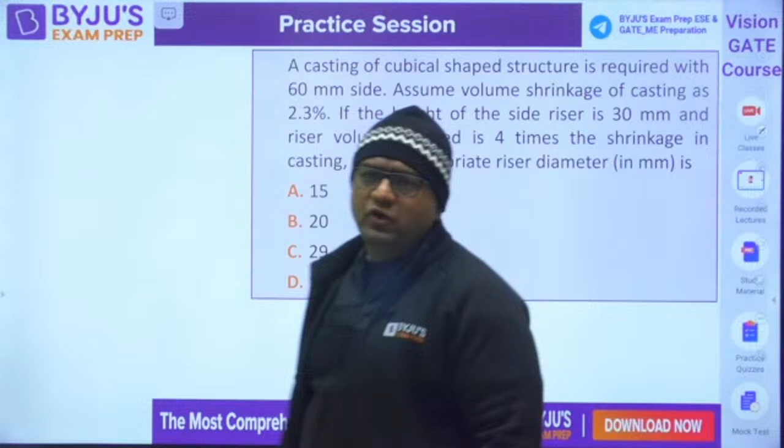So guys, now this is the very first question in front of you from casting. You just need to be with us till your exam. We are having each and every arrangement for you.

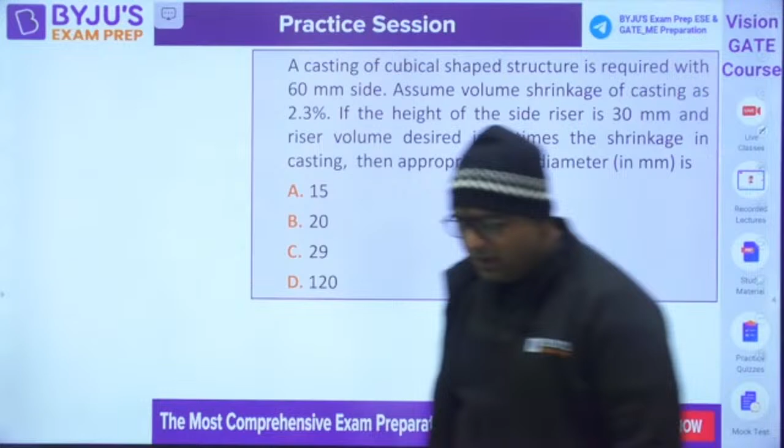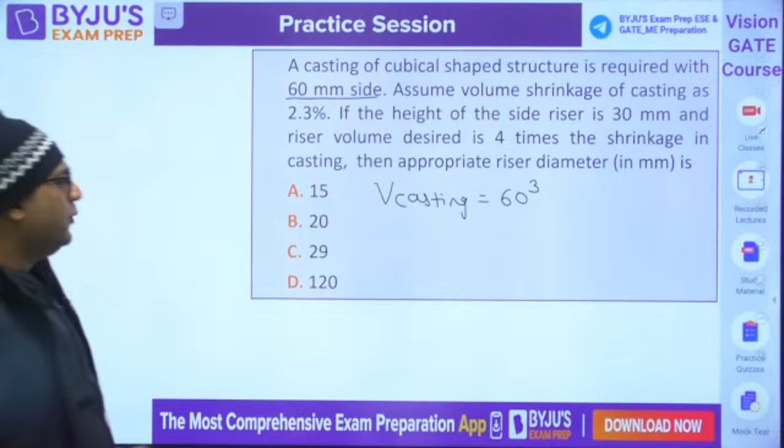Okay, so this is the very first question. A casting of cubical shaped structure is required with 60 mm side, and this is the casting size. So if someone will ask you what is the volume of casting, then volume of casting is nothing but 60 cube. Then they are saying assume volume of shrinkage is 2.3%. So 2.3 by 100 into volume of casting. This is the shrinkage volume.

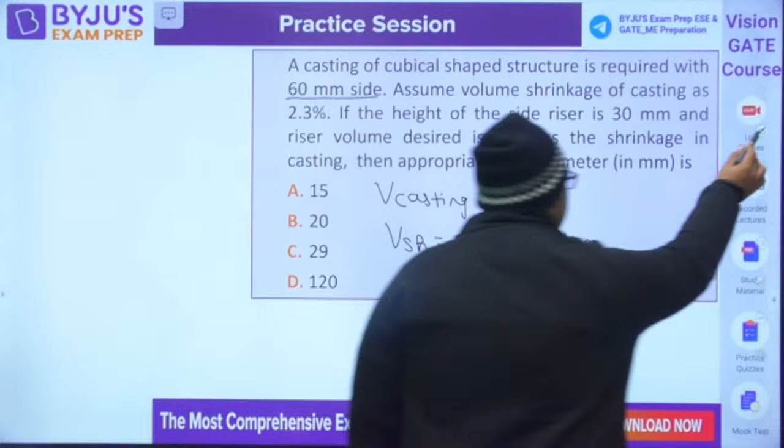Then they are saying the height of the riser. They have given the height of the side riser. Height of riser is 30 mm. When height of riser is given, now you know they have also given that riser volume is 4 times the shrinkage volume. So they have given one data which you will be using, and you will be saying the volume of riser is 4 times the shrinkage volume. So when you will be going for that, since it is a side riser, it is first of all pi by 4 d square h. H is known to us.

Four times shrinkage volume. From here you would be getting the diameter value, but don't answer it as it is, because this is the shrinkage volume method. Here the scope of improvement is there.

So you need to check whether the modulus of riser is more than or equal to the modulus of casting or not. Modulus of riser will be volume by surface area. Volume is nothing but pi by 4 d square h. Surface area is 2 into pi by 4 d square plus pi dh.

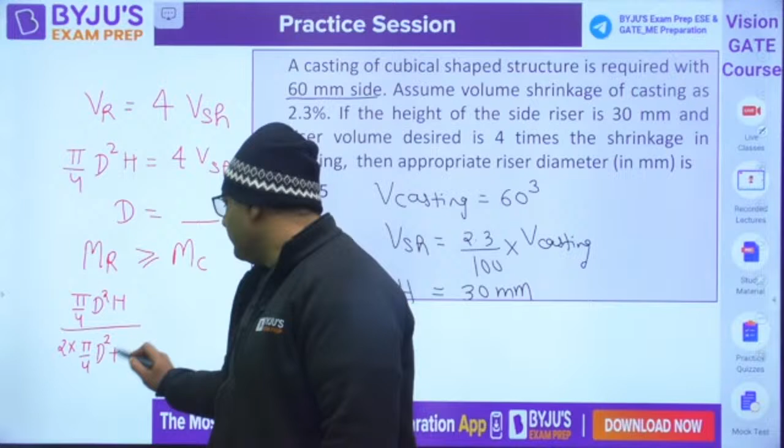This is going to be the surface area, and you need to equate it by volume of casting, that is 60 cube, and what is that, 6 into 60 square, 6a square. So this will give you some value of diameter.

You need to consider the maximum of both will be the answer. Whatever be the more, that would be your answer. Just solve this question, guys.

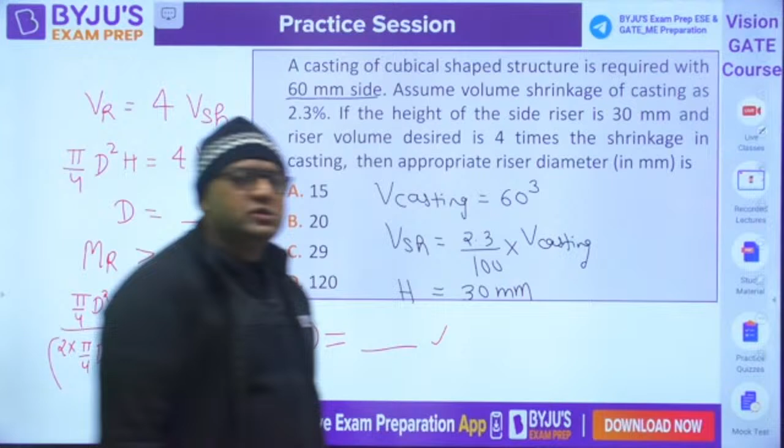Solve it, guys. Solve it, guys. I want answer from all of you guys.

Yes, all the things are in front of you. You just need to do the calculations, nothing more than that.

Shreyas is saying answer is coming out to be 20 mm. 20 or 120, Shreyas? Please check 20 or 120.

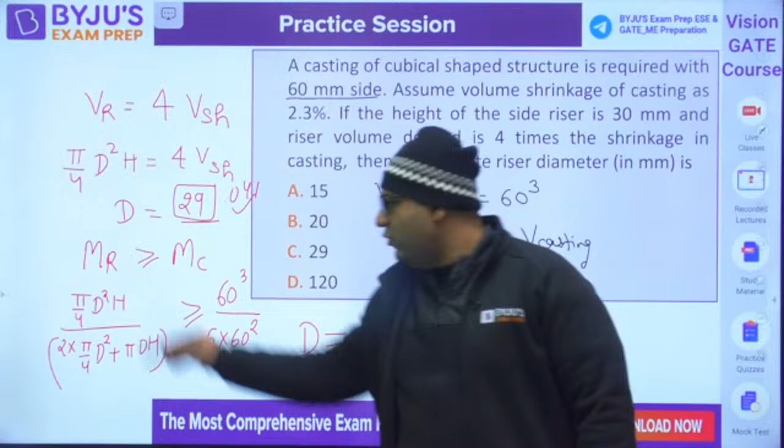So then you need to find out this also, na, modulus of riser more than or equal to modulus of casting. That will give you what? Because maximum of both will be the answer.

Okay, in modulus you are getting 12. Faninder, okay, solve it. So when you are going to put pi by 4, here I am finding out d square, and I am having height given to us.

So when height is given to us, you will be putting the same value of height which is given. It is nothing but 30 mm.

So into 30 divided by 2 into, as it is a side riser, so 2 into pi by 4 d square plus pi dh. So from here you need to find out, it is more than or equal to 60 by 6. That will give you one value of diameter.

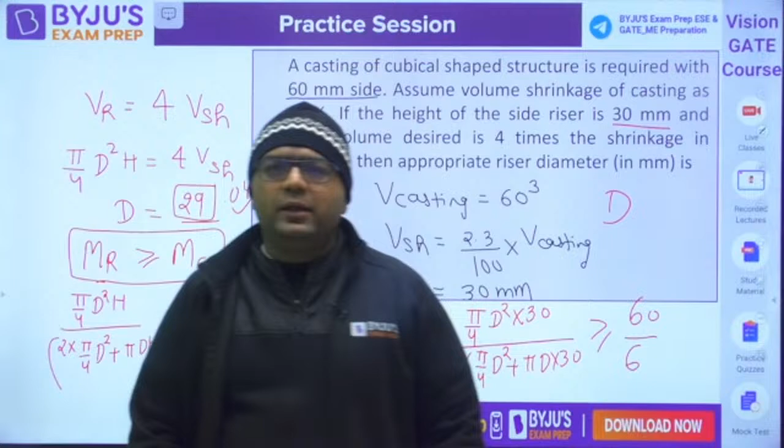Okay. So now if you are getting this value as 29.047 and this value is coming less than 29, then definitely 29 would be the answer. And if this value is coming more than 29, then this will be the answer.

And when you will be calculating from this, you will be getting 120. So answer will be D.

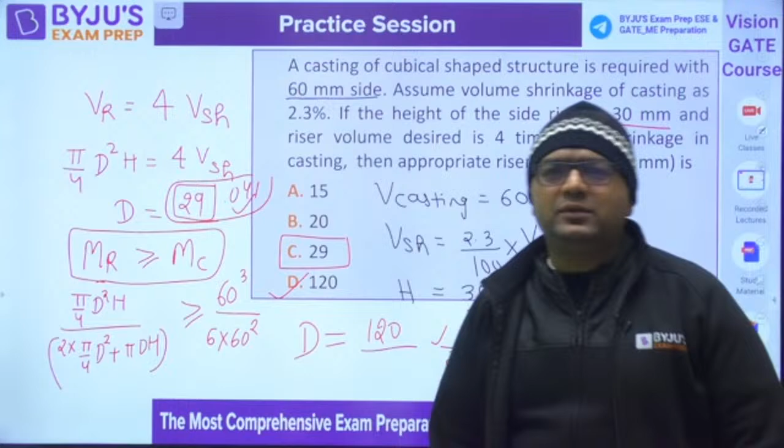That was the mistake you guys were doing, and I was thinking when you will give the right answer. Now I feel Ajay, Rishi, Shreyas have given the right answer. Yes, very good. Fine. 120 would be the right answer.

That's why I was thinking, okay last time the class was very late, now what mistake did I make in the calculation. Okay, so this question is over.

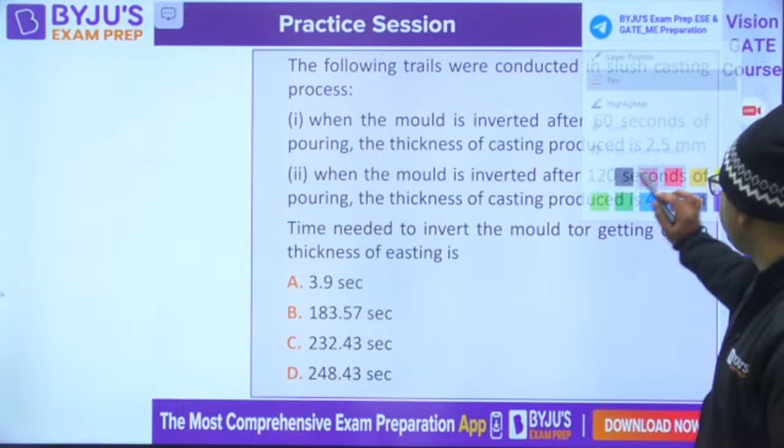Moving further to the second question. This is from slush casting. If you remember, that also I taught you in the marathon. What this casting is saying: the following trials were conducted in the slush casting process.

When the mold is inverted after 60 seconds. If you remember, for that we know TS, solidification time, is directly proportional to thickness square. From here we have written thickness equals C1 square root of solidification time plus C2.

So you know that when the mold is inverted after 60 seconds, thickness is 2.5 mm. So 2.5 mm equals C1 square root of 60 plus C2.

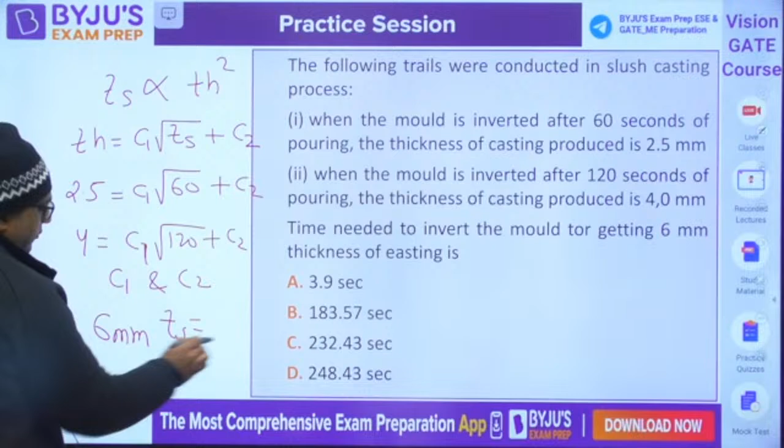Second, they are saying 120 seconds for 4 mm, C1. 120 plus C2, this will give you C1 and C2. Then you need to find out for 6 mm what is the solidification time. This is the case of partial solidification. I feel that in GATE 24 there are chances you get a question from this, because all other things have already been asked in the paper. So there are chances the question will come from here. Just solve this question, guys.

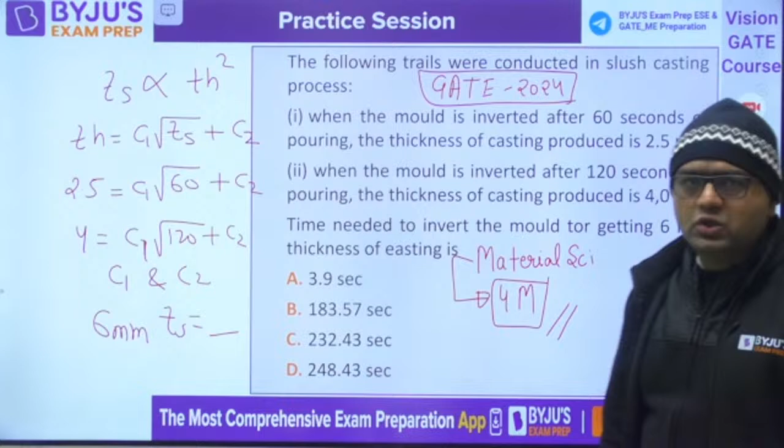Very good, so solve this question guys. Question number 2 from casting. We are covering all the types. Question number 2 from casting.

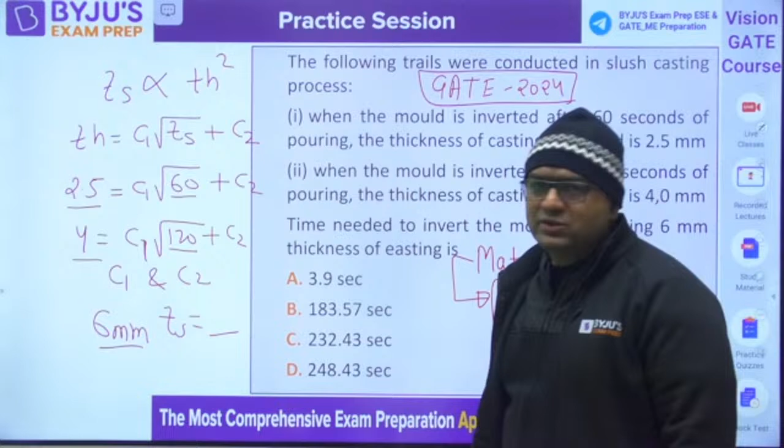No Rishi, your answer is not correct. When for 2.5 mm we require 60 seconds, for 4 mm we require 120 seconds, for 6 mm how can we go with 3.9 seconds? It is anyhow going to be more than 120 seconds. Yes, Shreyas have given the right answer, 232.43 is the correct one. So the answer is going to be C for this. Very good Shreyas, others also please verify the answer.

Then we are moving to the next question. We have one question from permeability number as well. Very good Ajay, very good Faninder. What about others? Solve it guys. Very good Hari, bahut badhiya, wonderful dear. So guys, do like and share the session. This is just the second question we have done, moving to the third question guys.

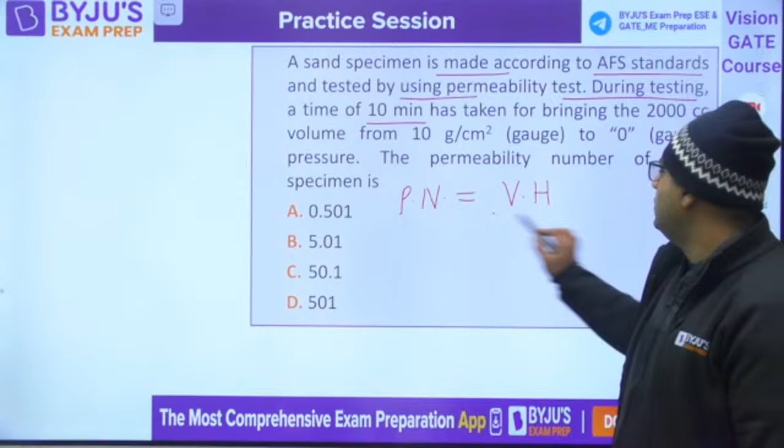A sand specimen is made according to AFS standards and tested using the permeability test. During testing, a 10 minutes time. So you know the permeability number formula: V into H, divided by delta P, A, TF. You know here volume should be in centimeter cube, height should be in centimeters, and since it is not given, height will be 5.08 centimeters. Area is pi by 4 d square, and height and diameter are also equal. So you need to find out the permeability number.

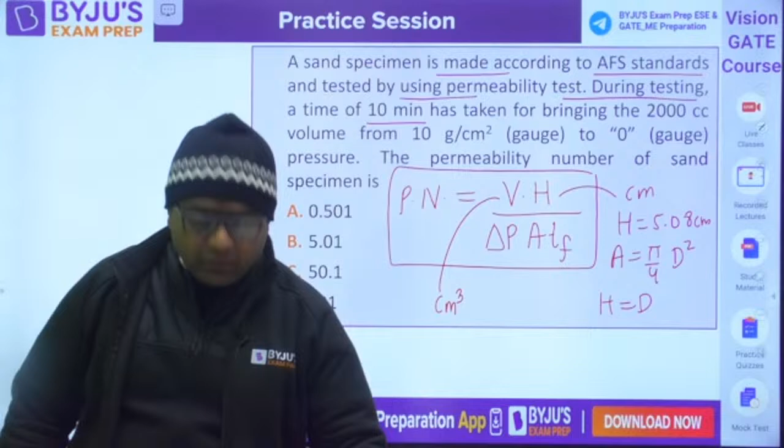Very good guys, bahut badhiya, just solve it. Very good Ashray, bahut badhiya. Okay, 5.01 Faninder is saying. What about others? 5.01 Faninder is saying, what about others? Shreyas is also giving the same answer. Yes yes yes, so when you solve this you would be getting the permeability number as 5.01. So the answer is going to be B for this. Clear for everyone? Very good, very good, very good guys.

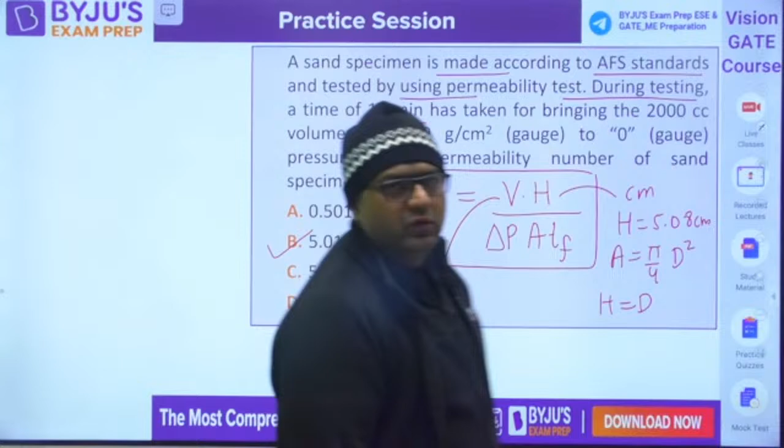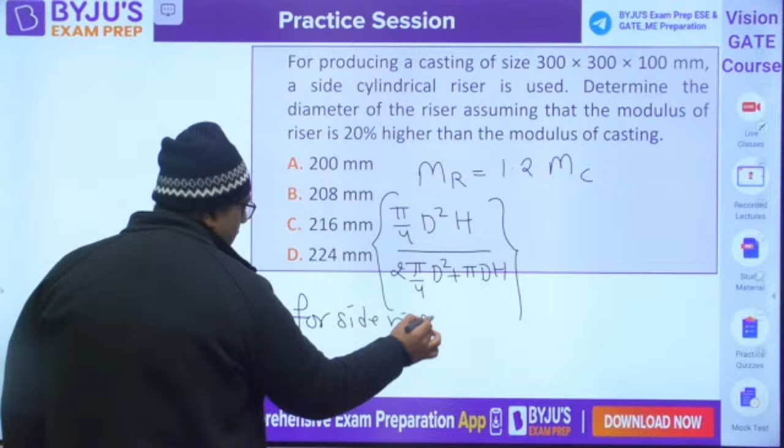So moving further to the next question guys, related to the modulus method. They have given that for producing a casting of this size, a cylindrical riser is used. Determine the diameter of the riser assuming the modulus of the riser. So you know modulus of riser is 1.2 times the modulus of casting. Modulus of riser is nothing but pi by 4 d square h divided by 2 times pi by 4 d square plus pi d h. And you know, since they are saying it is a side riser, everybody knows for a side riser, diameter is going to be equal to height.

Okay, and you know, 10 am Ashray, same time. Then we have 1.2 times modulus of casting. Modulus of casting will be 300 cross 300 cross 100. You know the surface area will be 300 cross 300 plus 100 cross 300 plus 100 cross 300, multiplied by 2. This would be the modulus of casting, and this will give you the value of diameter. Long calculations are required in the casting numericals, but I feel you will be doing this very easily. Solve it and get the answer. I am waiting for your answer. Calculations you just need to do.

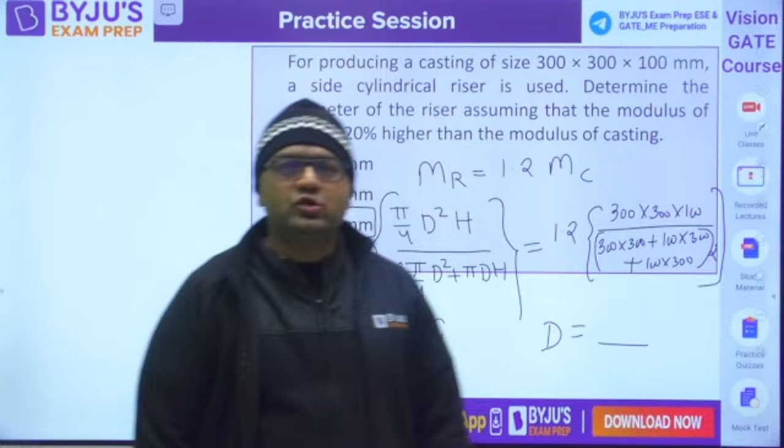So guys, moving further to the next question. Next question is this, and this time a similar question is there. Casting of this size takes 30 minutes. Then this will take how much time?

You know that solidification time of 2 by solidification time of 1 equals volume by surface area 2 square, divided by volume by surface area 1 square. But when you put the value, you can also write it as V1, V2 by V1 and SA1 by SA2, so V2 by V1.

Okay, V2 by V1. What is V2? 500 cross 300 cross 100, this is V2. Here you can write it now as V2 surface area 1 by V1 surface area 2 squared, because the solidification factor gets cancelled out. So this is V2 by V1 as 500 cross 400 cross 200.

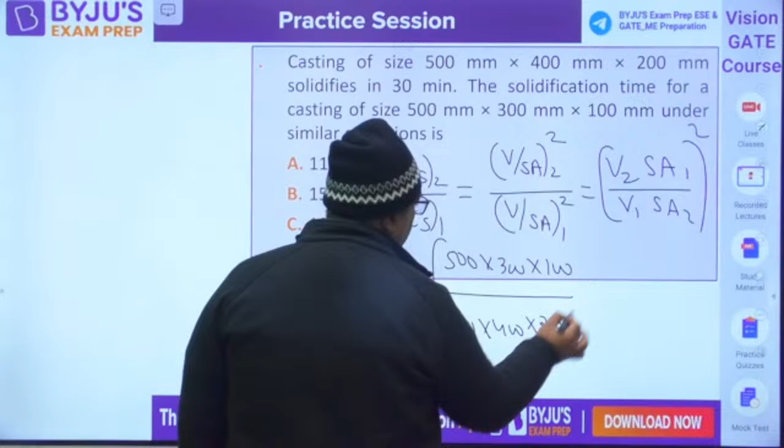Into surface area. Now you know surface area is 2 times of this, this is surface area of 1: 500 cross 400 plus 400 cross 200 plus 500 cross 200, divided by 2.

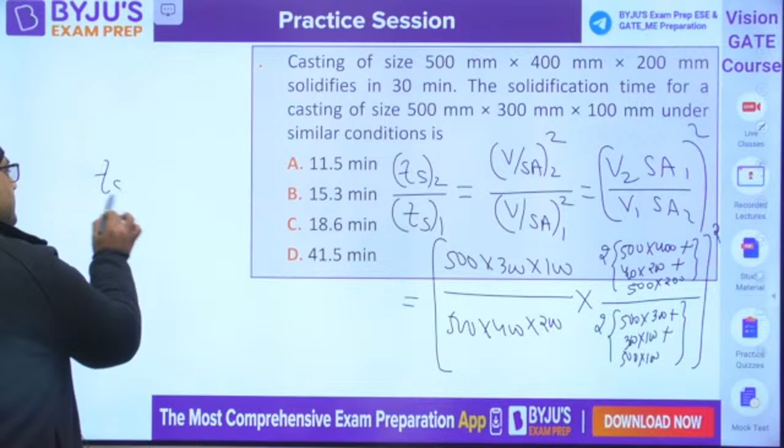Then we have 500 cross 300 plus 300 cross 100 plus 500 cross 100, and then you would take the square of this. This will give you the solidification time of 2. Very large calculations, but this type of question comes in the GATE exam, so we cannot ignore them.

Okay, Rishi is saying A would be the answer. Let us see. Shreyas is also saying the same. And if I say you are correct, then I will say yes, 11.5 is correct. So when you go for the calculation, the answer will come out to be 11.5 minutes.

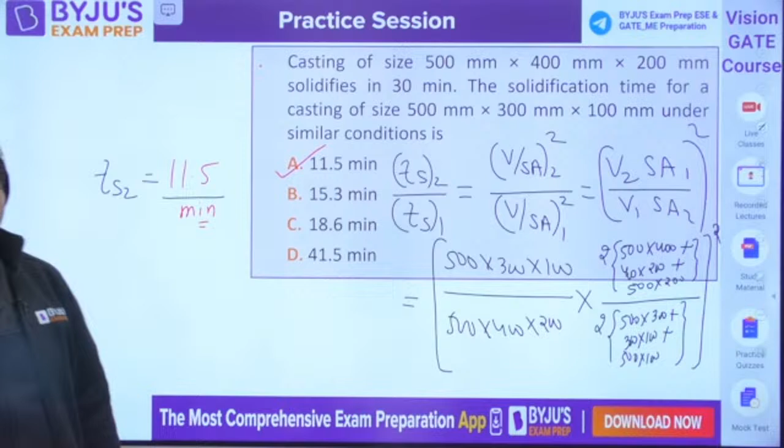Clear for everyone, guys? Clear for everyone? So we have completed 5 questions from casting. Now let us move to the 6th one.

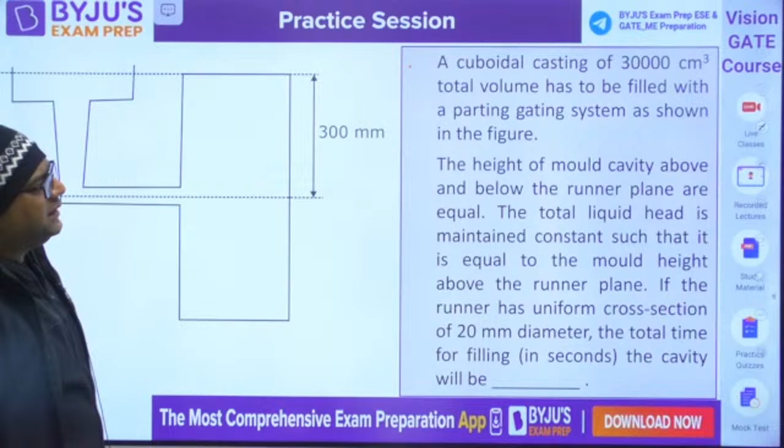This is about the time required to fill from the gating system. Here, whenever they give 30,000 centimeter cube total volume, you can see this is divided into 2 parts: 15,000 here and 15,000 here. 15,000 is filled by the top gating system, 15,000 is filled by the bottom gating system.

And if this is A, this is B, so you need to find out the total time. Total time is nothing but time of A by top plus time of B by bottom. And you can see the height of molten metal and the height of this cavity is the same.

So whenever this happens, that the height of molten metal and height of cavity have the same value, then we can say the time required to fill by the bottom gating system is 2 times the time required to fill by the top gating system. So this becomes 2 times, and since both have the same size, we can also write it as 3 times of TA by the top gating system.

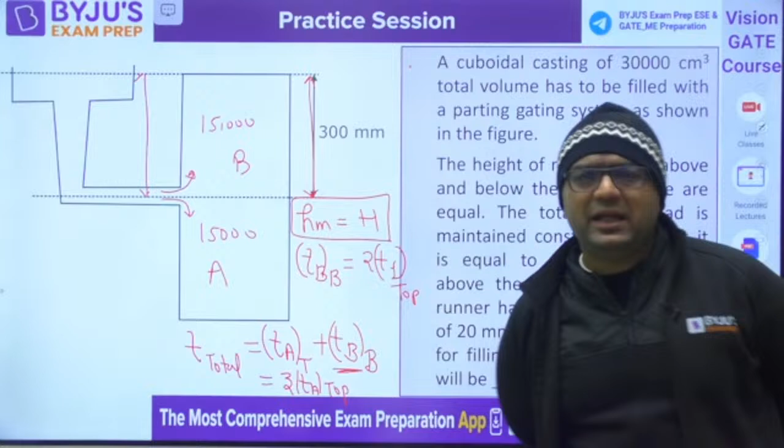So you just need to do this. It is a very easy question, very easy question. But I feel this type of question will come because in the exam they never ask you about the bottom gating system formula directly. And you know the top gating system formula? It is nothing but volume of casting by area of ingate into root of 2G HM. HM is given to you. The formula is in front of you.

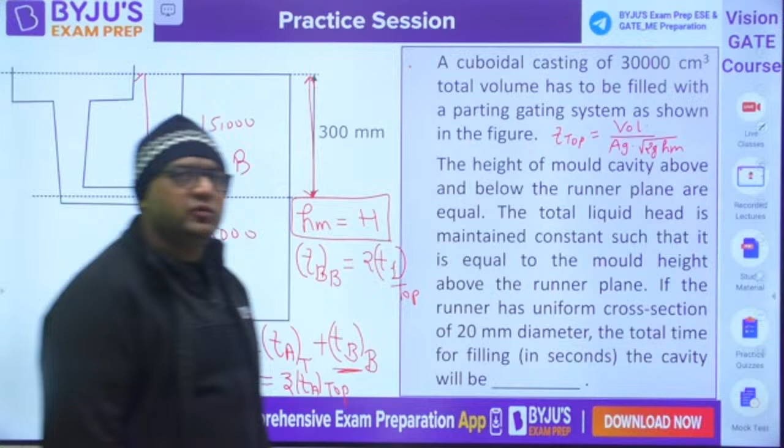Solve it, guys. This is question number 6. After this we have questions from welding, about six questions from welding. So I have taken 6 questions from casting, 6 from welding, 6 from sheet metal operation, total 18 questions in this session. This is the last one from casting. Solve it, guys. Solve it, solve it, solve it.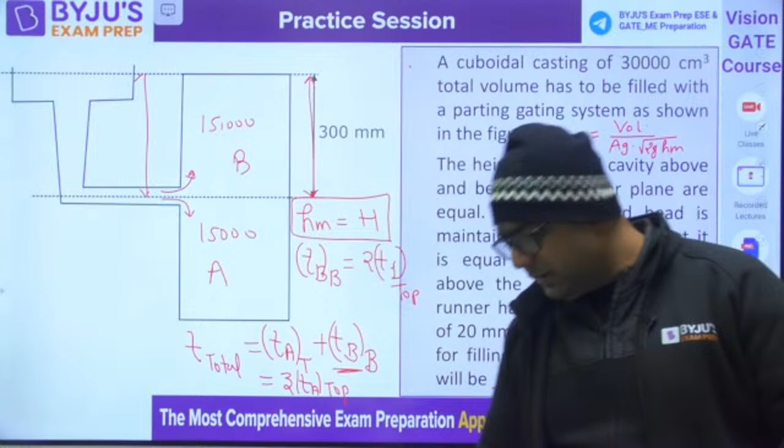Nobody has given the answer till now. It's not that difficult. You have volume divided by ingate area.

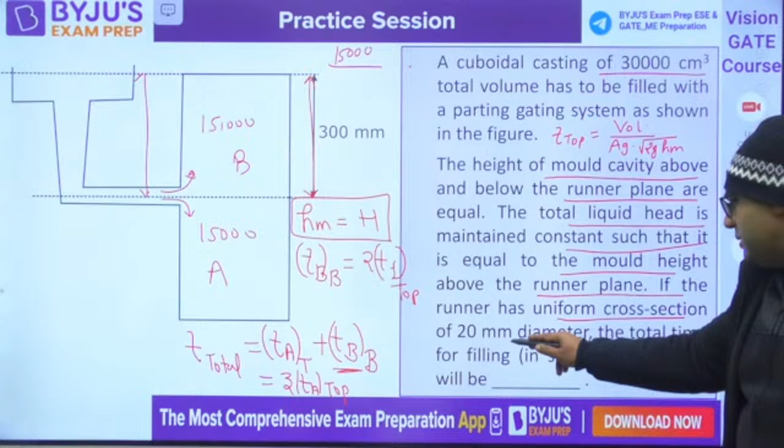They have said a cuboidal casting of this size is filled with a parting line gating system, the height of mould cavity above and below the runner plane are equal, the total liquid head is maintained as constant such that it is equal to the mould height above the runner plane. If the runner has uniform cross section of 20 mm diameter, find the total time. So this diameter is given, you can find out AG.

Yes, tell me. Everybody is getting 118.08.

So are you telling me the value for total or for only one top? Are you giving me the value for total or one top? Yes. Because in my calculation the answer is coming around 59.

Let me check in that case, because according to my calculation the answer is coming to 59.

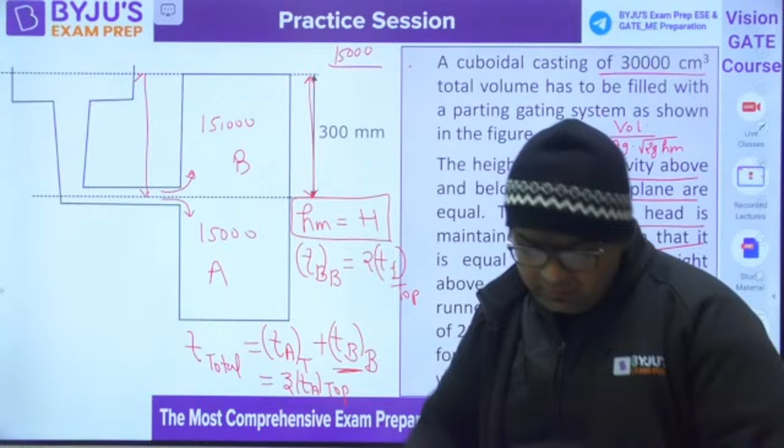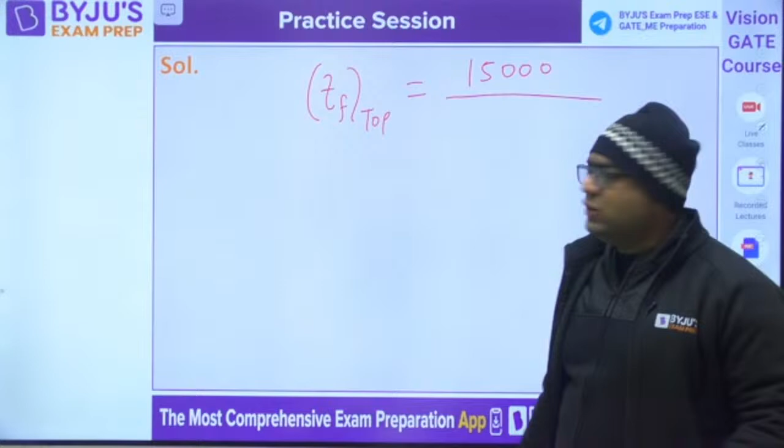Okay, so what we have done is found the time required to fill the cavity by top gating system. This formula is volume of casting divided by AG. Volume of casting will be 15,000 because we are taking this A part only. AG is pi by 4, 20 square into root 2GH, where H, the height of molten metal, is 300. This will give 1 TF.

And if you want to find out TF total, the answer is 3 times of this. So as per my calculation, the answer is coming out to be 19.68 seconds. Please verify once again.

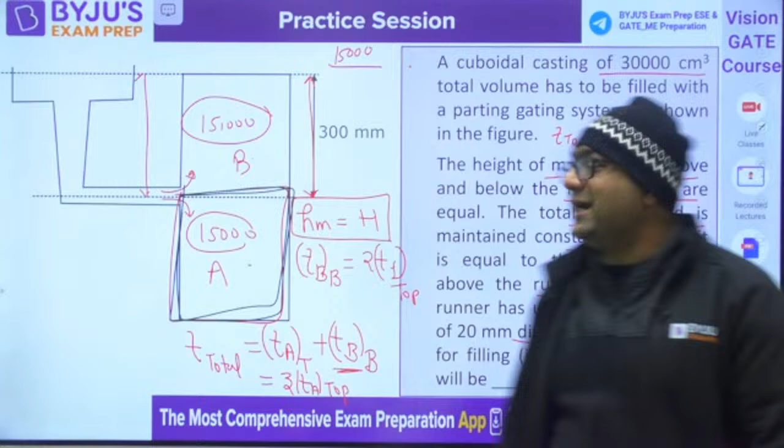59.04. Yes, I feel you guys have taken this 30,000 total. This is not correct, because you are finding out time for this to be filled by the top gating system, and the same volume is here, so that will be taken 2 times. 2 plus 1, 3 times. Yes, that kind of mistake you would be doing in the exam also.

Casting questions are over, guys. Now we are entering into welding questions. The very first welding question is in front of you. Tomorrow I am expecting you to come once again with the same intensity. Tomorrow is material science, don't take it lightly because the weightage is quite high.

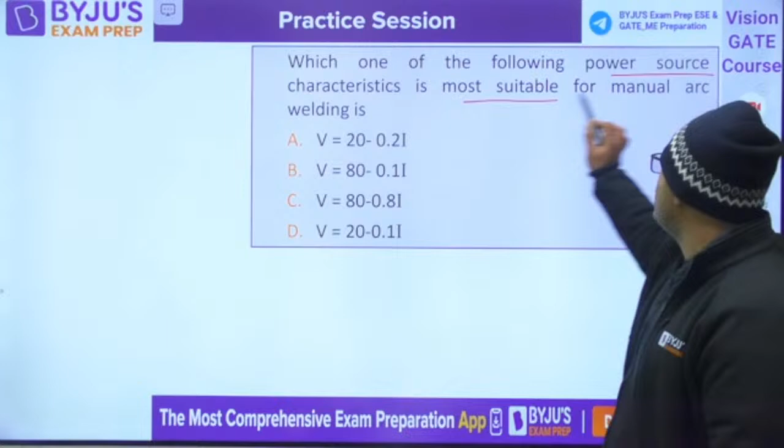Which one of the following power source characteristics is most suitable for manual arc welding? You know, in manual arc welding we want a drooping kind of characteristic. So you need to check what is the value of dV by di. We wanted less change of current with respect to voltage. So if we are going to have a high negative value

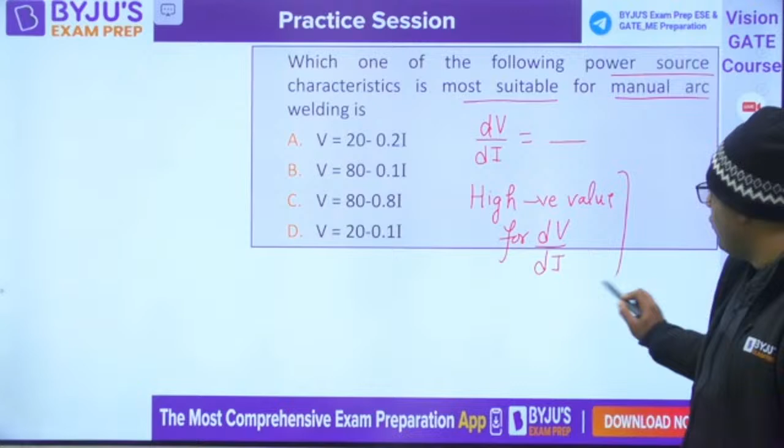for dV by di, that is going to be better. So just solve it. Yes, if you differentiate this, it will come out to be minus 0.2. This will come out to be minus 0.1. This will come out to be minus 0.8. This will come out to be minus 0.1. C is the right answer.

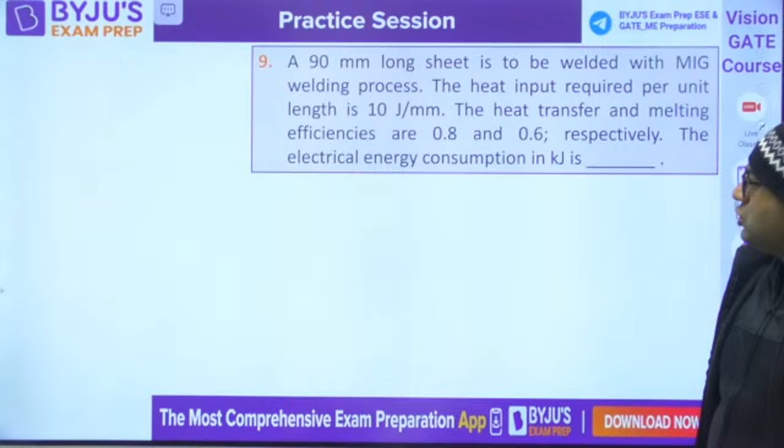So guys, moving further, this is the second question from welding. In the welding lecture I covered everything, from duty cycle to everything.

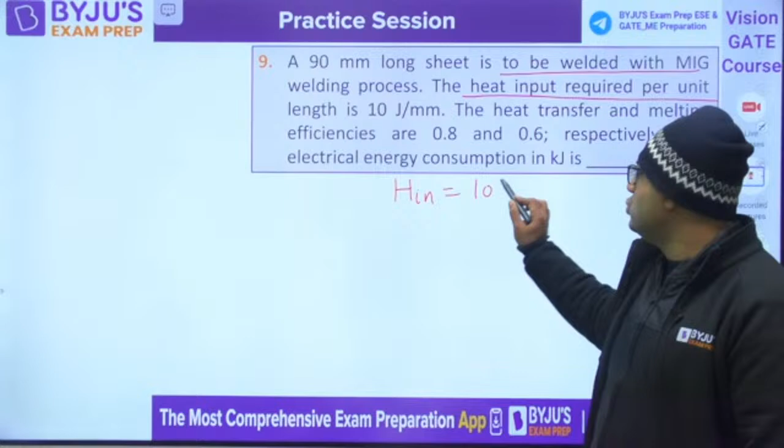A 90 mm long sheet is to be welded with the MIG welding process, the heat input required per unit is 10 joule. So heat input required is 10 joule per mm, and it is 90 mm long. So total, when I go for total input, it is 10 joule per mm into 90 mm.

But they are asking the total energy consumed, and they have given 2 efficiencies. So let us see how many of you give the right answer. This is a numerical answer type question. They have given 2 efficiencies, and you need to find out the total electrical energy.

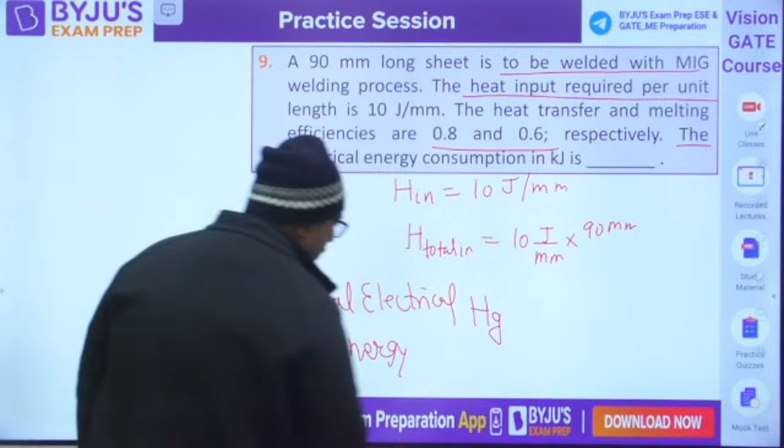So when they are saying total electrical energy, they are asking you for heat generated. And they said this long sheet is to be welded with this, which is actually heat required.

So if you want to go for heat generated, you have 2 efficiencies in that. Heat supply by heat generated is heat transfer efficiency. Then heat required by heat supply is thermal efficiency or melting efficiency. And overall efficiency is the product of heat transfer into thermal efficiency. So overall efficiency is nothing but heat required by heat generated. So you just need to find out heat generated, which would be heat required by overall efficiency.

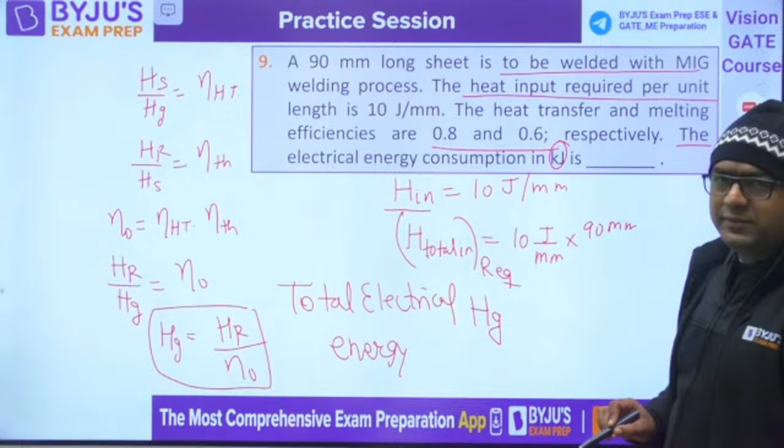Solve it. Yes, what you would be getting is 1.875 kilojoules. They are asking in kilojoules, right Shreyas? Don't make that mistake, they are asking in kilojoules, so the answer is 1.875. For numerical answer type questions, you need to be careful about that.

Moving to the next question, guys. This is question number 10. During a MIG welding operation, the electrode diameter used is 2 mm, feed rate is 3 meter per minute, total area of weld is given, then find out the welding speed.

It is a very simple question, you just need to go for the volume flow rate equation. You know that the electrode is getting filled, and whenever you see the three-dimensional diagram, we are having this in the direction of welding. So area of weld into velocity of weld equals pi by 4 into diameter of electrode square into feed rate of electrode.

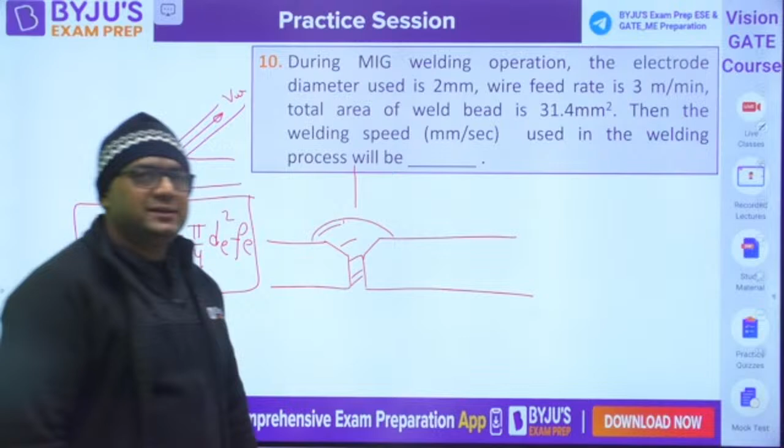This is a practice session going on. You know, for every subject we are having a practice session. We have seen for machine design, strength of materials, and now production.

Vinay is saying the answer to be 5 mm per second. Ajay is saying 5.000 which is the same. Very good. What about Faninder? Ashray, Shreyas is saying 5, very good. Darshan, Chili Mishra.

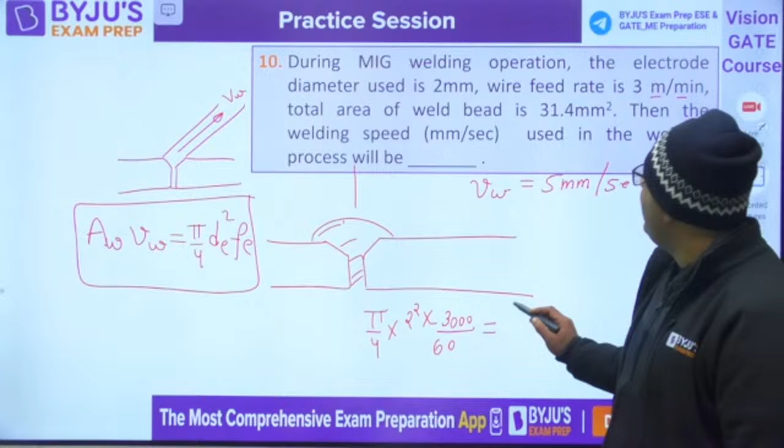So you would get the velocity of weld after equating as 5 mm per second, because what you need to do is pi by 4 into 2 squared, and feed rate is 3000, which is still mm per minute. You need to have it in seconds. So 1 minute is 60 seconds, and area of weld is 31.4 into velocity of weld. The answer comes out to be 5 mm per second.

Very good, guys. Moving to the next question.

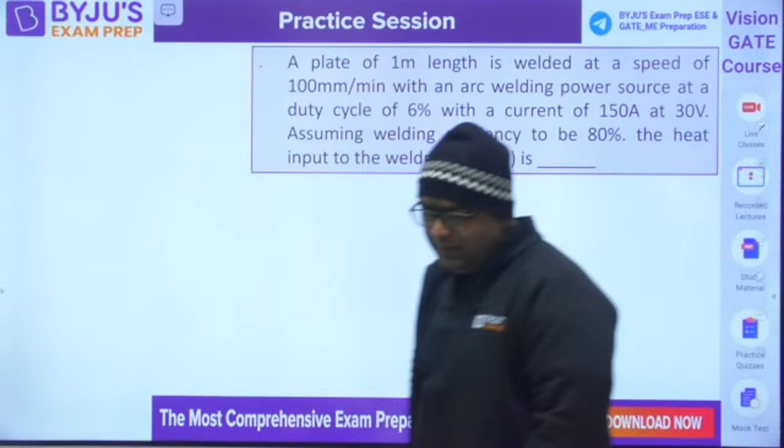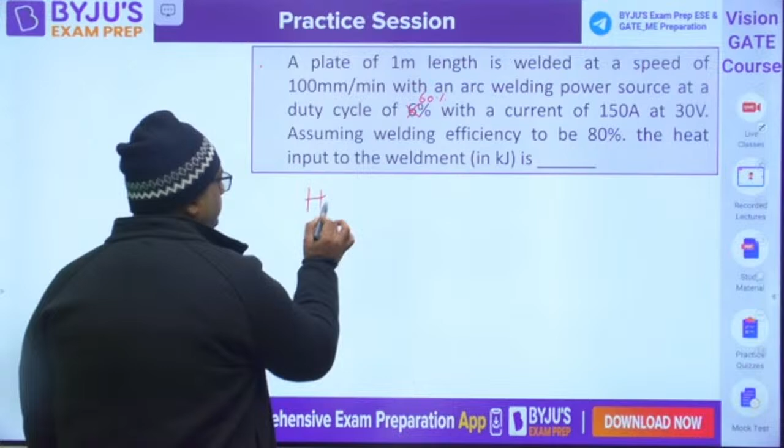Okay, so moving to the next question, once again from welding. This is a plate of 1 meter length welded at a speed of 100 mm per minute with the arc welding power source at a duty cycle of 60%. With a current of... you know they are asking for heat input. For that the formula is efficiency times voltage into current divided by velocity.

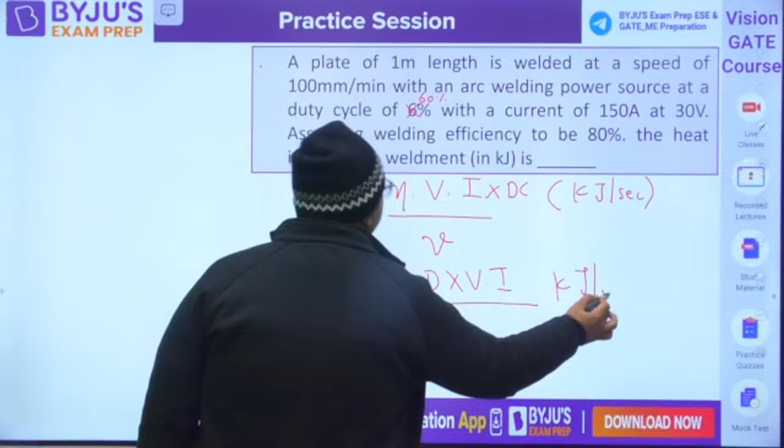You want it in kilojoules. This will be giving you the answer in kilojoule per second. So to get it in kilojoule, you divide it with velocity. They have already given the plate as 1 meter length, so it will come per meter only. As duty cycle is given, you will multiply it with duty cycle as well. So the formula will be efficiency into duty cycle into voltage into current divided by velocity of welding. It will automatically come out in kilojoule per meter, because the length is 1 meter.

So just try to answer it. Try to answer it. So whatever you get, solve it. Solve it, guys.

They are asking for the total heat. So here, whatever you get in kilojoule per meter or per mm, put the appropriate units. Efficiency is 0.8, duty cycle is 0.6, voltage is 30, current is 150. Till now this will give you the answer in joules per second. Then if you put the value of velocity as 100 mm per minute, converting it into per second by dividing by 60, this will come out in joule per mm. So you need to multiply it, joule per mm, into 1000 mm.

This will give you the answer in joules. Then you need to find it in kilojoules. In kilojoules, would it come out to be 1.296 or 1296?

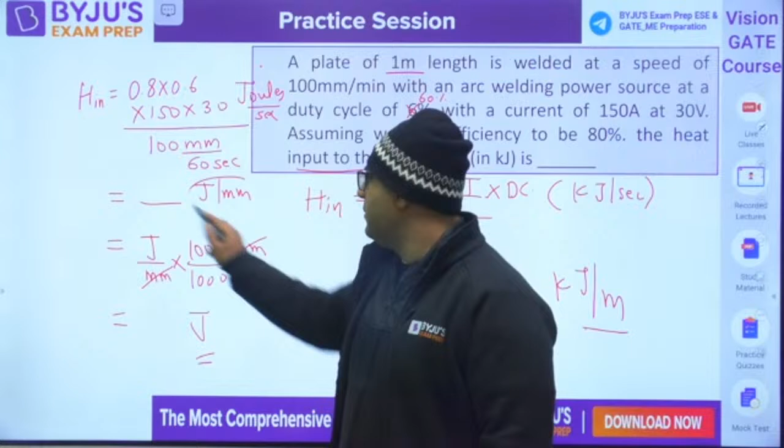You need to understand one more thing here: the units joule per mm will get cancelled out. So if you want it in kilojoule, you divide by 1000. So whatever you get here in joule per mm, that itself is the kilojoule value. So I feel we will get 1296. Here only the confusion of units will make your answer negative or your marks zero in this question.

So take care of these things properly, guys. Very good, Rishi, Darshan, very good. Moving to the next question, guys.

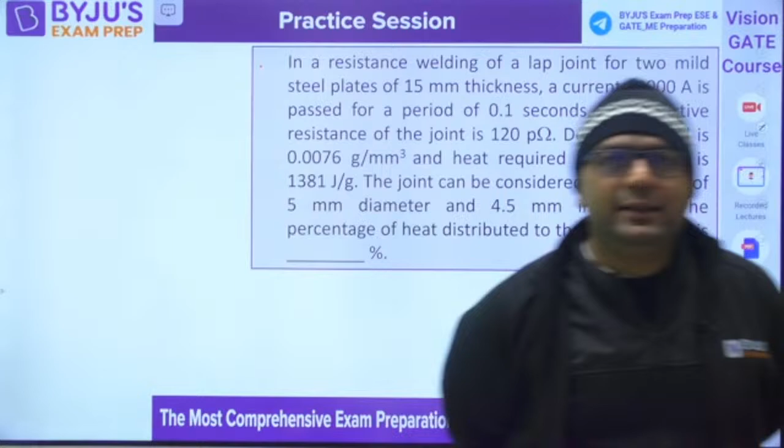In a resistance welding of a lap joint for two mild steel plates of 15 mm thickness, a current of 10,000 amperes is passed for a period of 0.1 second, the effective resistance is given. I feel you can very easily find out heat generation as I square RT. Then they have given you the density.

First of all, you need to find out the mass of nugget. Mass of nugget is density into volume. Then after getting the mass, you will go for heat required, which is mCp delta T plus m into latent heat. They have not given any specific heat, so only this much will be calculated, this will not be.

So they have asked about the efficiency. So what you need to do, you just need to say the efficiency would be heat required by heat generated. Once you will get it, obviously 1 minus efficiency would be your answer, because they are asking the percentage of heat dissipation. Try to solve it and get the answer.

You know they have given the cylindrical nugget, so volume of the nugget is pi by 4 d square h. Try to solve this question. This is a good question, resistance welding, all types we have covered. After this we will enter into sheet metal operations question.

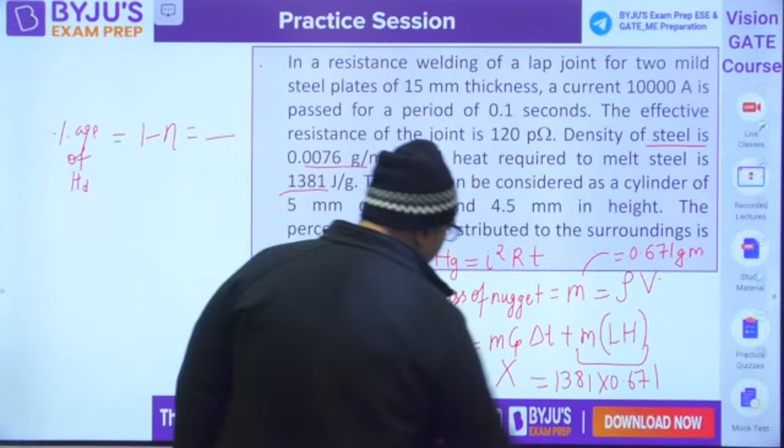Then you can find out the heat, normally given as 1381, not latent heat. This is nothing but 1381 into 0.671. This will be your heat required. So when you will be going for it, you can also directly go for heat generation minus heat required, by heat generation into 100. That will be the percentage of heat dissipation.

Very good, very good. Okay, Vinay is saying 22.72%, that is correct answer. 22.72% is correct.

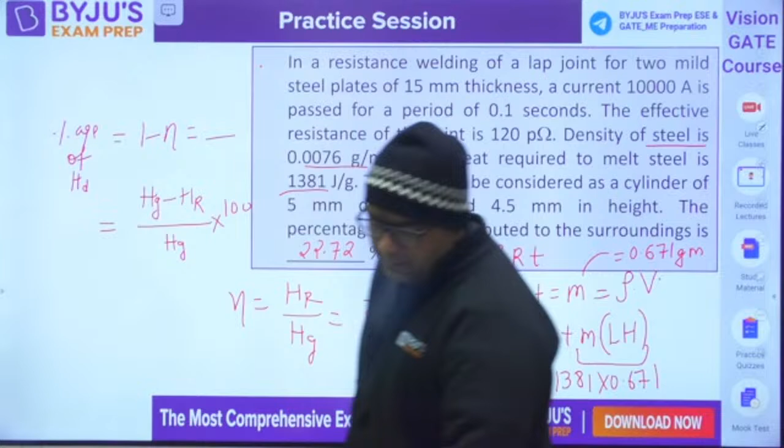With this we have completed the welding question. Now we are entering into sheet metal operations. Clear for everyone? Very good Ajay, very good Shreyas. Yes, Faninder, kahan gaye? Ashray, very good.

So entering into the next sheet metal operations. A circular blank of diameter 20 mm is to be produced from a sheet of 2 mm. The crushing stress induced in the punch material and the ultimate shear strength of the sheet metal to be 275 MPa. You know that pi by 4 d square into sigma cr is equals to pi d t into tau permissible.

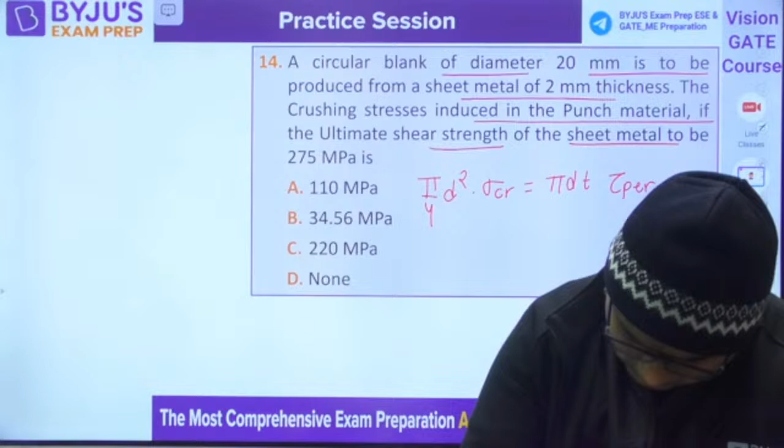Okay, that you need to do. Is it clear? Just try to solve it and let me check whether the data given is complete or not. Solve this question. Yes, this is complete only. Solve it.

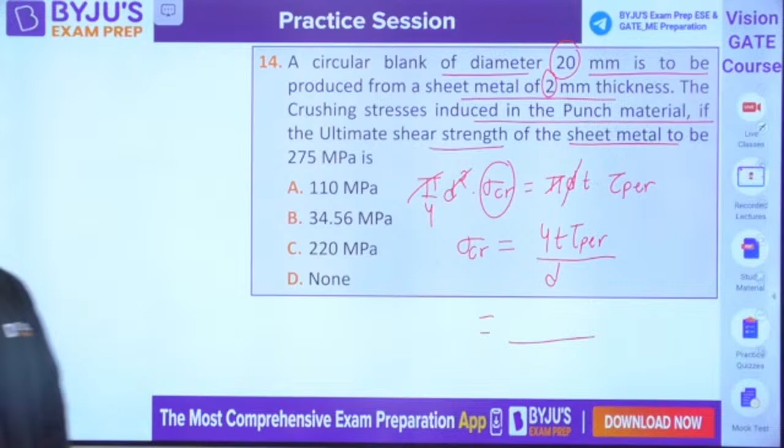So you need to find out what. They have given you diameter, they have given you sheet thickness, and the crushing stress induced in the punch material, that you need to find out. Sigma CR is unknown, D D cancel out, pi cancel out, so it will be 4T tau permissible divided by D. Very good, Rishi, Faninder, Shreyas, Vinay, Ajay, answer is correct.

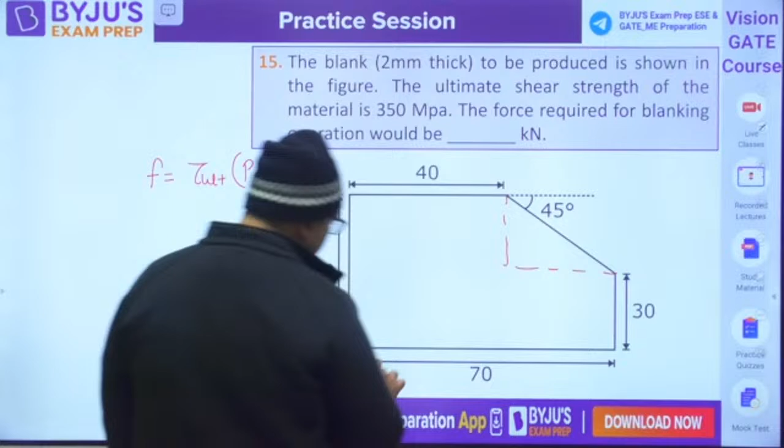Moving further, guys, question number 15. This is a good question. You know that the force requirement for blanking is tau ultimate into perimeter into thickness. For perimeter you need to add all the sides, and for that you need to find out this side as well. You already know if this is 70, this will be 30, and if this is 60, this will be 30. So this is nothing but 30 root 2. So perimeter is the sum of all the sides.

Next you can very easily do it, solve it guys. After this we have 4 more questions, but they are small only. Sheet metal operations questions are simple.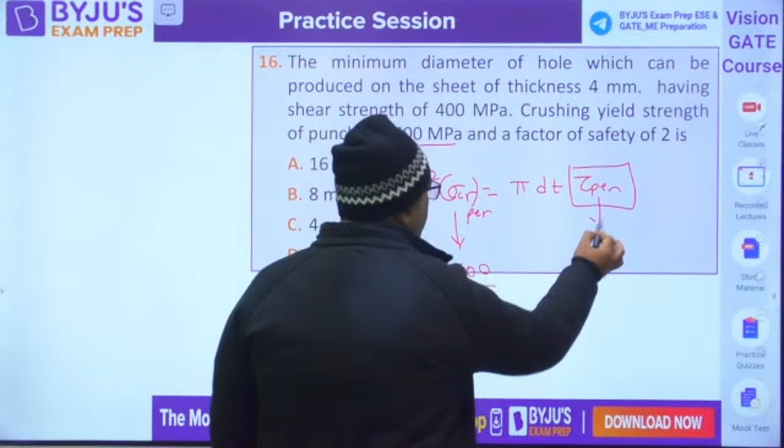You need to find out the minimum diameter. Solve it, guys. Solve it.

Okay, you are getting 8 mm. Very good Ajay, bahut badhiya. Faninder, bahut badhiya, answer will be 8 mm for sure. 8 mm is the right answer. Very good.

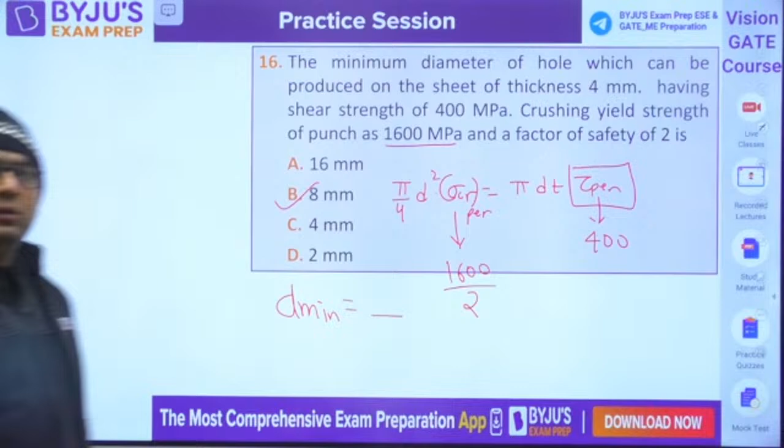Next question, guys. In blanking, very good Vinay, Ashray, Shreyas, Darshan, Aman.

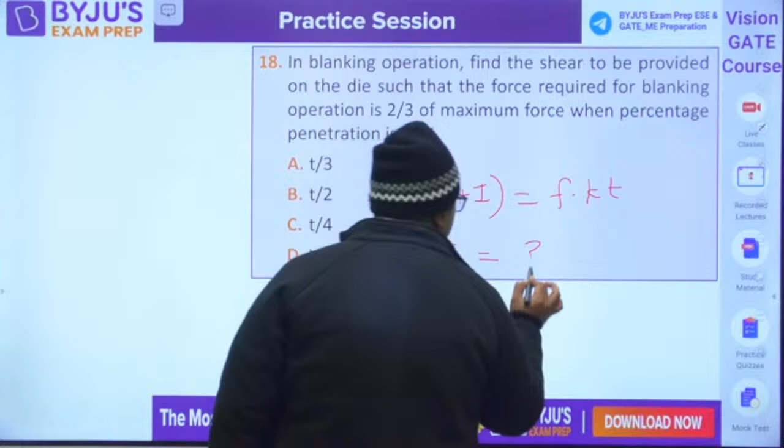So in blanking operation, find the shear to be provided. You know, for this, the shear force KT plus I is equals to F into KT. You need to find out the shear. K value is 0.5.

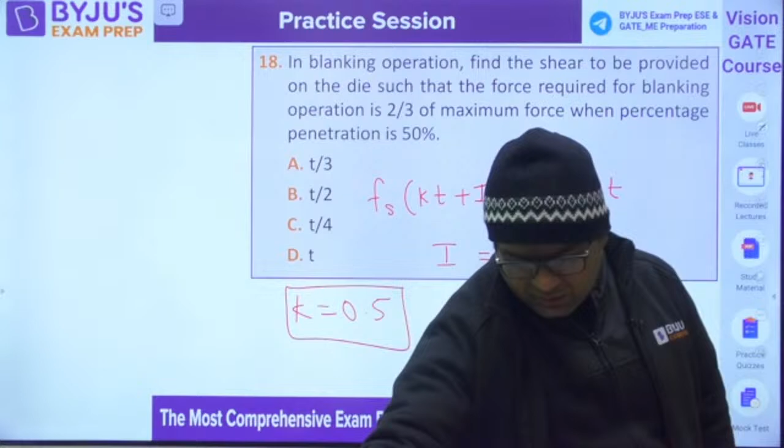Yes Ajay, answer will be 8 for that. Solve this one, guys. After that we have 2 more questions. Sorry, 1 more question. So you would be...

Having, they are saying that in the blanking operation find the shear to be provided so that the force required is 2/3 of the maximum force. So this Fs is 2/3 of the F. So you would be having 2/3 into 0.5T plus I is equals to 0.5T. So you need to find out the I.

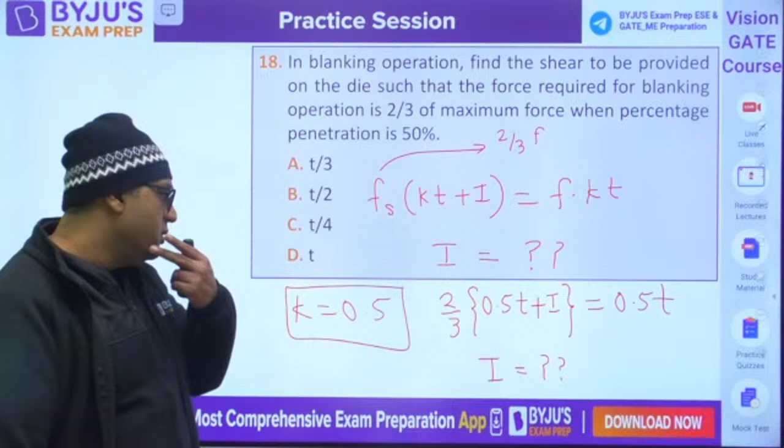So 3 will be going there, 1.5 - here it is 1.5T. Yes, I feel very easily you can do this, just by looking at this I can say answer will be C. Can you feel it? Arey bhai, this is the force when shear is provided, this is the force when shear is not provided. It is 2/3. So when you will be cancelling these two, you will be getting 2/3 here. When you will go for 3 here, this will become 1.5T. 2 into 0.5T is 1T, so 1T will be coming here 0.5T.

And you know I will be multiplying 2I, I will be coming out to be 0.5/2. 0.25T will be the right answer. Very easy question, okay, now everybody is clear. Shall we go to the last question? Very good, last question guys.

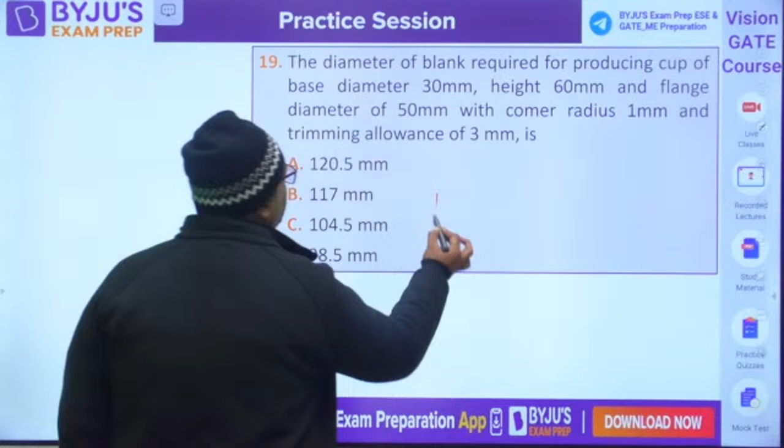This is the last question when trimming allowance is given. This question I have done in the marathon also, so I feel this you will be giving the answer to me. Here you need to find out first of all the diameter, then you know trimming allowance is given, so plus 2 times of trimming allowance.

So here they have said the diameter of the blank required to produce a cup of base dia 30 mm, height 60, flange dia 50. So this is the cup - 30, 50, height. Solve it, guys.

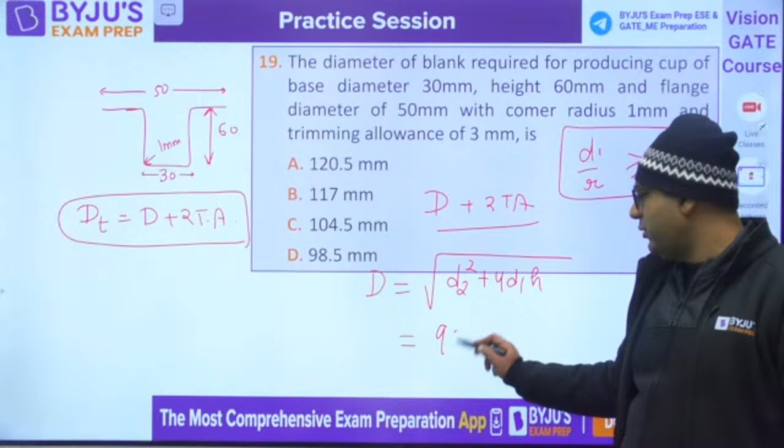First of all, I am telling you the formula. Because when you will be finding out the corner radius, as d1 by r is coming out to be more than equals to 20, so corner radius won't have any effect. This will be the formula. So when you will be applying, you will be getting 98.5. When you will be going for the trimming allowance, the answer will be 104.5.

Clear for everyone? Yes.